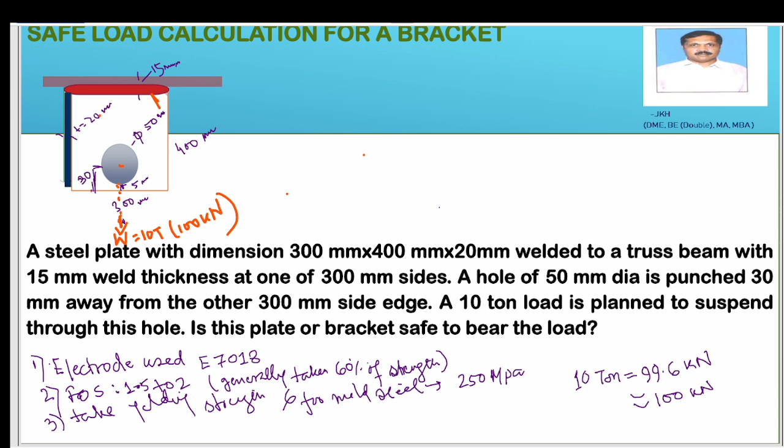Next one is tearing load. Tearing out, next one is shearing, and another is crushing. These four types of load are affecting here. So one by one we will calculate all four. First of all, welding load. For welding load we are using an electrode. Which type of electrode are we using? E7018.

The strength of E7018 is generally 70,000 psi. 70,000 psi is almost 483 MPa actually. If you convert this, it will give you 483 megapascal. But for factor of safety, we are taking 60%. So 60% of this will be 483 into 0.6. This will give you around 289.8 megapascal. This is the effective welding sigma.

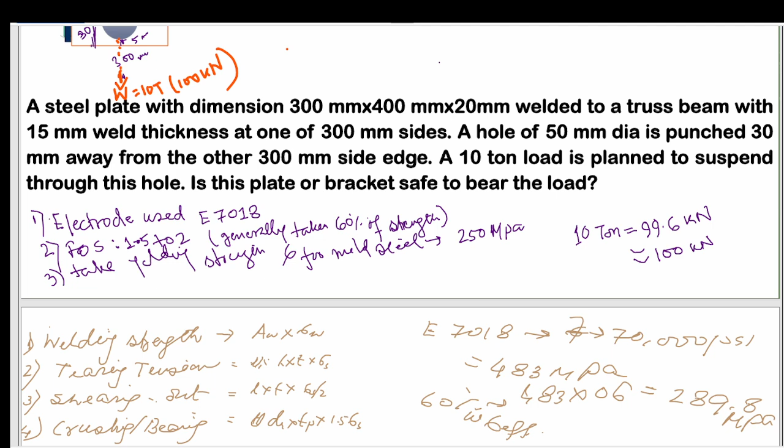Okay, so how much will be the welding load? For this we need to calculate the area also. Welding load is sigma weld times effective welding area. Now how much is the welding area? We know 15 thickness. So effective thickness is T over root 2, that is 0.707 into T, with T being 15, and this will give you 10.6.

And what will be the length? Effective length will be 300 on one side, another side is 300, total 600 mm. So effective area will be 600 into 10.6. So ultimately the calculation will be weld effective length 600 into 10.6 into 289.8.

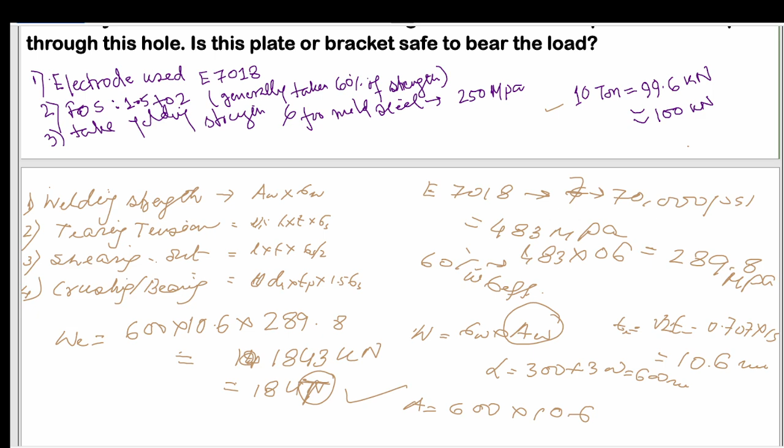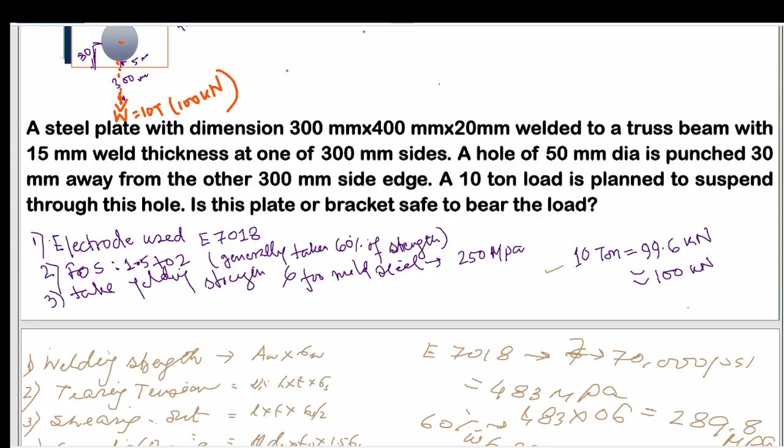Next case, tearing. For tearing, what is the length? We have taken the hole center 30 away. And what is the residual steel length? Because the dia is 50, the residual length is 5, and thickness of the plate is 20. So the area of tearing will be 5 into 20. 5 is the effective length and T is the thickness of the plate, 20. So effective area will be 5 into 20, that is 100 square mm.

In this case, L into T: effective length is 30 minus 25, that is 5. T is the thickness of the plate, 20, and for mild steel sigma is 250. So this will be 100. 100 into 250 means 25,000 Newton, that is 25 kilonewton. If you convert this to ton, it will be 2.5 ton. So this tearing load is not sufficient because it is not near 10 ton. So it will not allow.

Again, shearing, same 5 into 20 into, for shearing generally half of the strength is taken, or 60% of that, that is 0.6 of 250. You can take half also. So it will give you 15,000 Newton, means 15 kilonewton or 1.5 ton. This is also not okay because it is not near 10 ton.

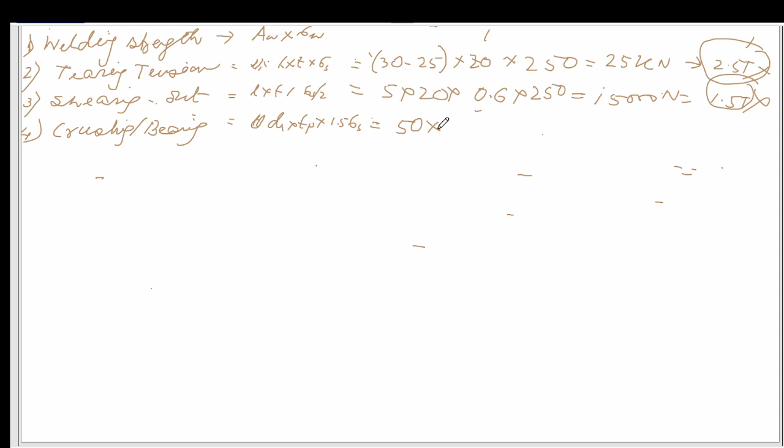Crushing. For the case of crushing, we have to take the dimension of the hole. Hole dia is 50, and thickness of the plate is 20. And in this case, we will take a factor of 1.5 times 250. This will give you around 375,000 Newton, or 375 kilonewton, or 37.5 ton. This is okay. So your crushing and bearing load is okay, but tearing and shearing load will not allow.

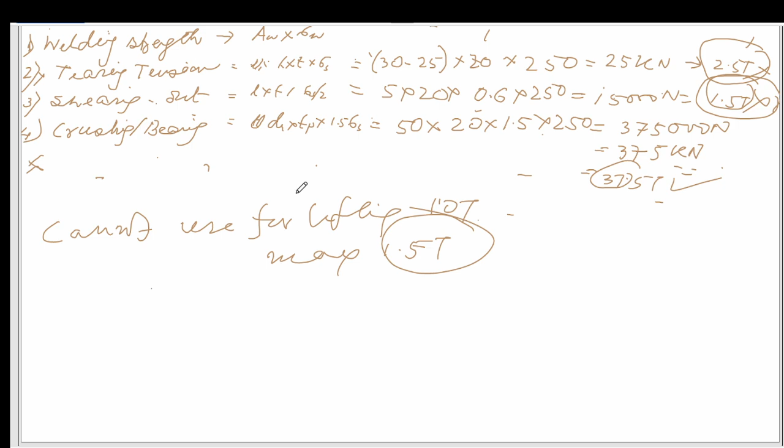So you cannot use this arrangement for lifting 10 ton. Maximum how much can you lift by this arrangement? Only 1.5 ton. Maximum 1.5 ton can be lifted by this bracket. So what is the reason for this? The main reason is we are taking the hole near to the edge. Only 5 gap is there.

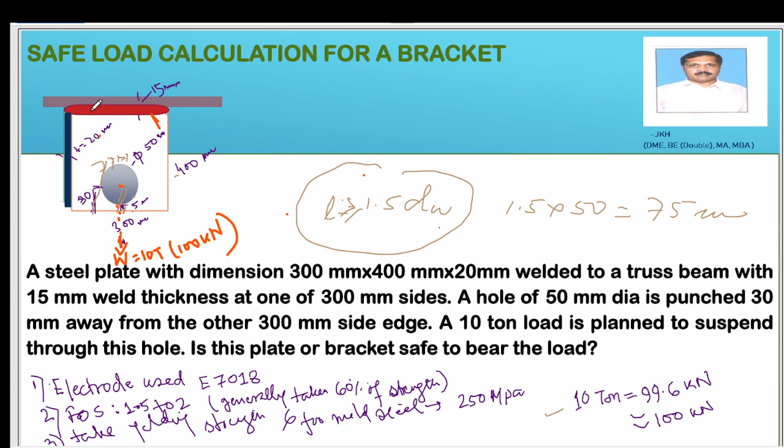You have to shift this hole deeper. At least this distance should be greater than 1.5 d, where hole dia is 50, so for this case 1.5 into 50 is 75. Instead of 30, you should have taken 75, then it would be sufficient to carry this load. So before punching any hole in the steel bracket or welding, you should calculate all these dimensions to suspend the load. I think it is clear to you and helpful for calculation of lifting load.